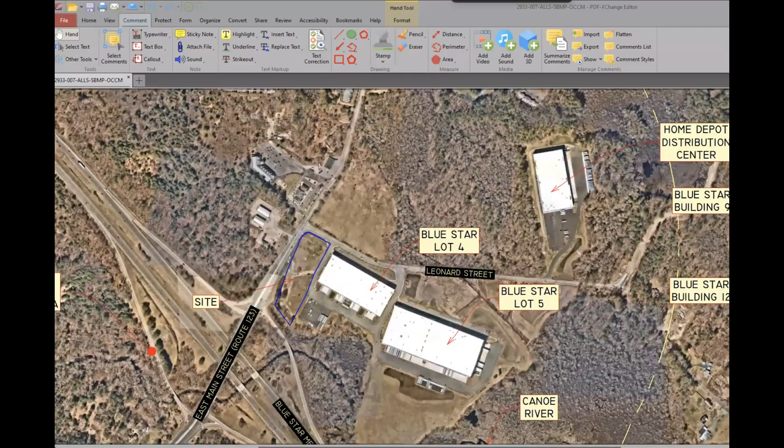Yeah, absolutely. Before you get going, I just want to note that member Lisa Carrozza is going to recuse herself from this project because her husband has ties to it.

Well, I don't want to interrupt the flow, but I've been thinking about this. She would certainly recuse herself from voting on decisions, but as a resident of town, I think she is certainly able to ask questions. It's been identified that there is a connection through a relative having done work, but I don't see... what does recusing in this context amount to?

If we were meeting in person, what she would do is step down from the podium, so to speak, or the board, and go into the audience. So with the kind of procedures made through virtual meetings, it's best for her to turn off her screen and technically be a member of the audience under that condition.

Okay, but I personally don't think that's necessary. We've identified what some people could consider an appearance of conflict, but this is not the equivalent of a gag order during a proceeding, so I'm a little more relaxed about it in that regard. But we've identified the possibility of conflict, so enough said—we will move on.

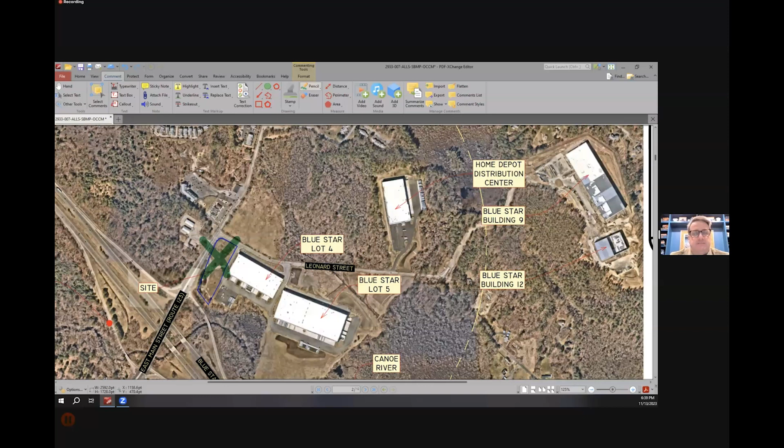If we can turn to the next page, Brandon, showing the facility itself. This is the property we're talking about out front. As I was alluding to, the parking is in the front, on the Leonard Street side, with the entrance coming into the shared access. All utilities are in place. The building is 32,420 square feet, similar in look to the other facilities, with loading docks for trucks in the back.

If you want to touch base, Brandon, and come in on the civil design and engineering with landscape and the basins, infiltration, traffic flow, we can go from there.

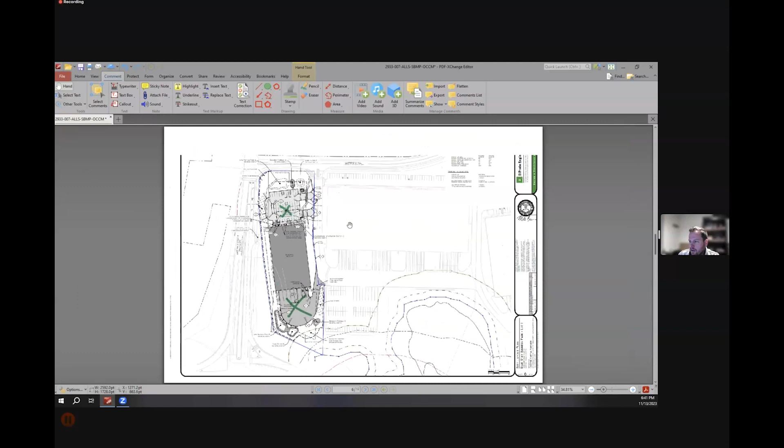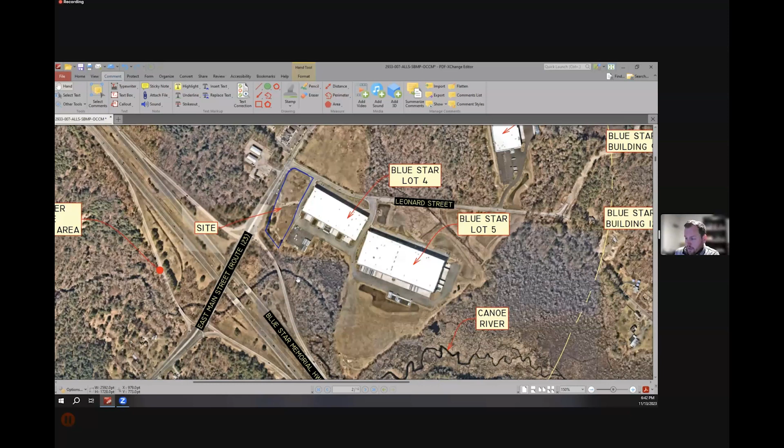I should point out why we're before conservation. If I flip back to the aerial, this site is located at the front here, right at the corner of East Main and Leonard Street, and the Canoe River is south of our property, with some wetlands associated with the Canoe River. We don't have any wetlands on our site, but a portion of the 100-foot setback from the wetland and the 200-foot riverfront do come onto our site.

So all our development—all our paved surfaces, stormwater ponds, and buildings—are outside the riverfront. The only section of work we're doing in the riverfront is this small area here, which is actually disturbed today; we'll just be removing a bit of a stockpile that extended into the riverfront. We'll be reseeding that and letting it grow back naturally. The previous application did have work in that riverfront, so the only work here is to restore that riverfront area.

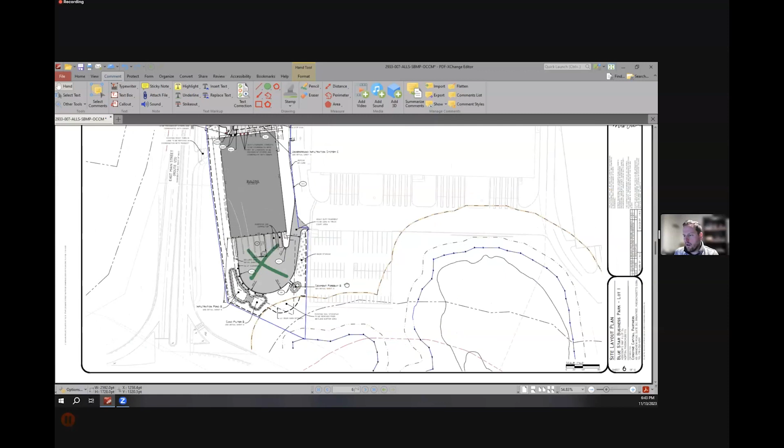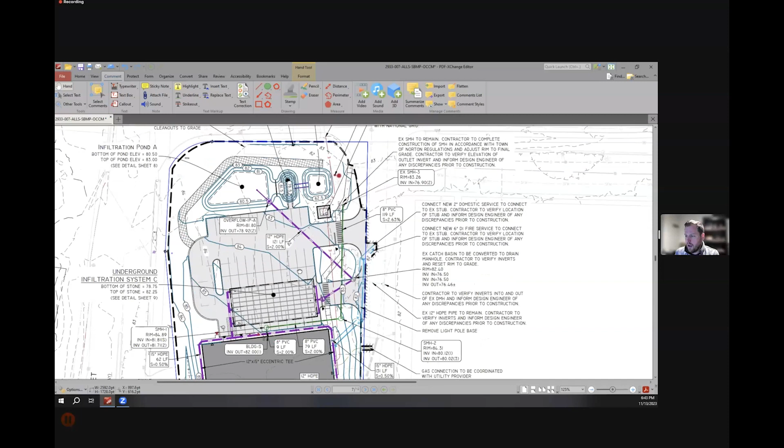From a stormwater standpoint, we have 3 treatment BMPs. Working from the front to the back of the site, we have a combination sand filter here, an infiltration basin that treats the front parking lot, then an underground infiltration system that serves the roof. The overflow from that front sand filter is connected into there, so that infiltrates up to the 100-year storm for the front parking lot and the roof—those 2 practices combined.

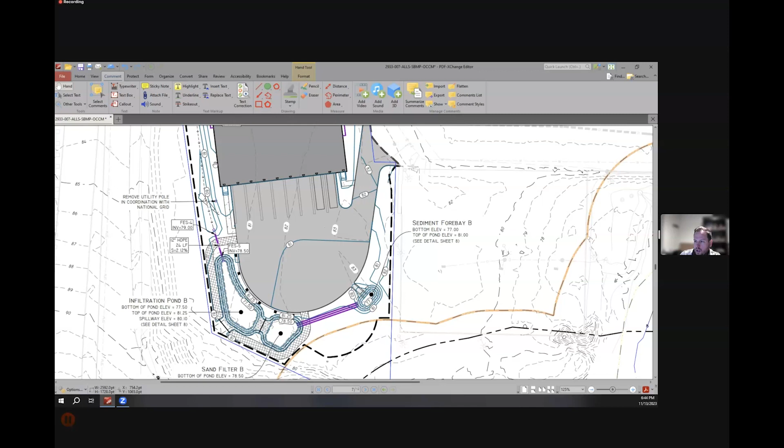In the back, we have a similar setup—basically a paved waterway to a sediment forebay, to a sand filter, and also another infiltration pond. That handles the back parking and loading area, as well as a swale that runs along the western side of the building, between our building and East Main Street, which captures some runoff from that side yard area and some that comes down the embankment from 123 East Main Street.

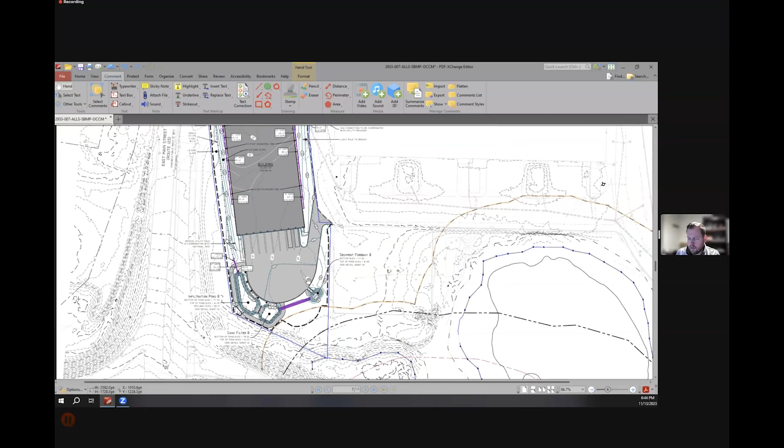I don't believe that infiltrates up to the 100-year storm, but it overtops, I think, past the 25-year storm. But we meet all requirements on a site basis and watershed basis—water quality, infiltration, and peak attenuation. Everything's designed per the town standards and per the Mass DEP Stormwater Handbook. We did have a peer review done by, I think it was Amory, which I don't have in front of me right now.

Was it Amory, John? It was Pat Brennan. He's actually, I guess, not working with them anymore. He has his own business now. I recognize the name, and I think he used to - so Pat Brennan did the review.

We got 4 or 5 comments, responded to them, and got it all clear from him on that. If there's any questions on the peer review, I can go through it, any of the individual items.

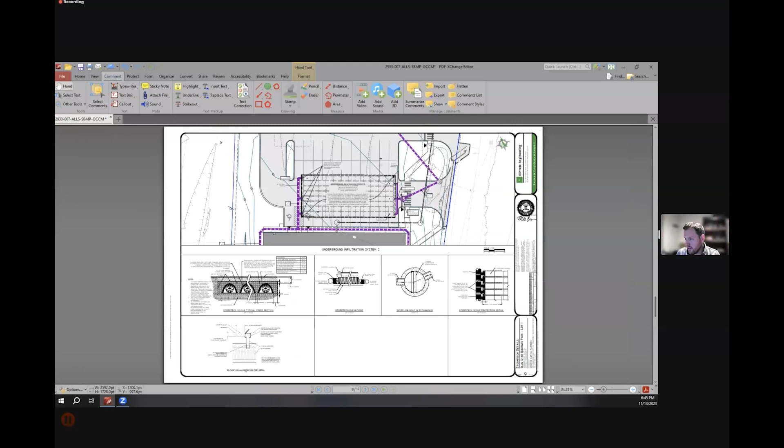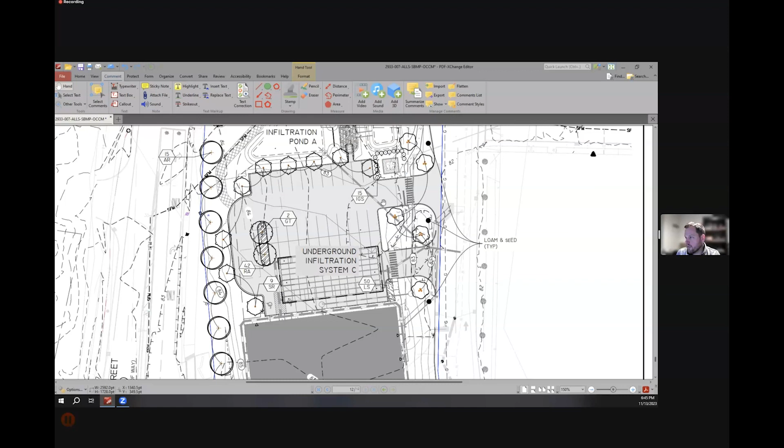I'll just walk through the landscape plan we submitted. We're providing street trees along Leonard Street, some plantings around a proposed sign on the corner, and street trees down the side to buffer us from East Main Street. Plantings, required grass and different plantings in the 2 stormwater areas, and some street trees around the parking lot.

The remainder is loam, seed, and some screening for the transformer up front. But for the most part, a very typical mix, similar - one of the same species that we provided in the back for phase 2, Blue Star.

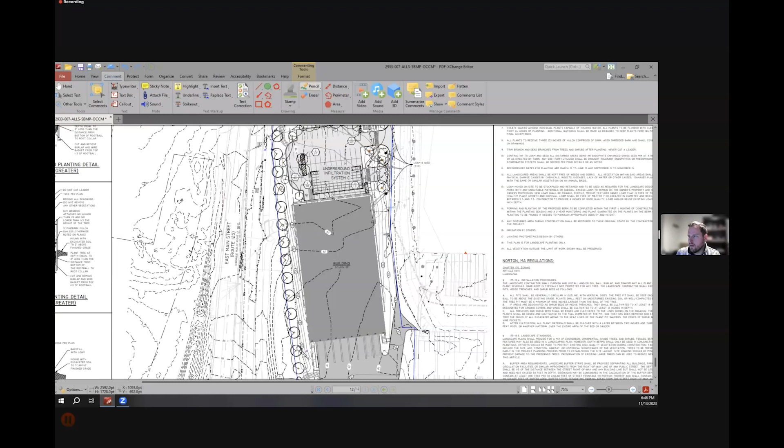The last thing, not really a conservation item, but in case anybody has questions - there is an existing right turn lane off of East Main Street that was going to come in right between the 2 retail lots. One retail lot stood here, one stood down here, so that served as the main entrance to that retail off of East Main.

That's going to be removed as part of this. It doesn't work for this program anymore, so we would work with MassDOT to remove that curb cut. So I think that's a high level overview of the site design.

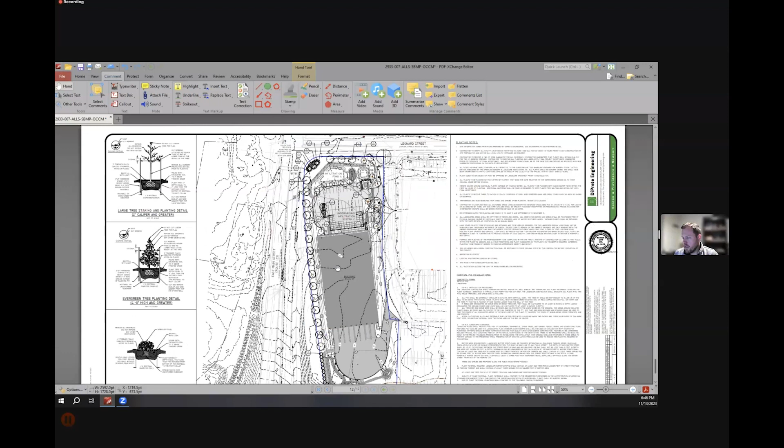We did a site walk with a few members, John, on Friday. And like I said, we received an all clear on the peer review, but if you have any questions on particularly the site design, anything we're proposing, or the peer review, we're happy to answer them.

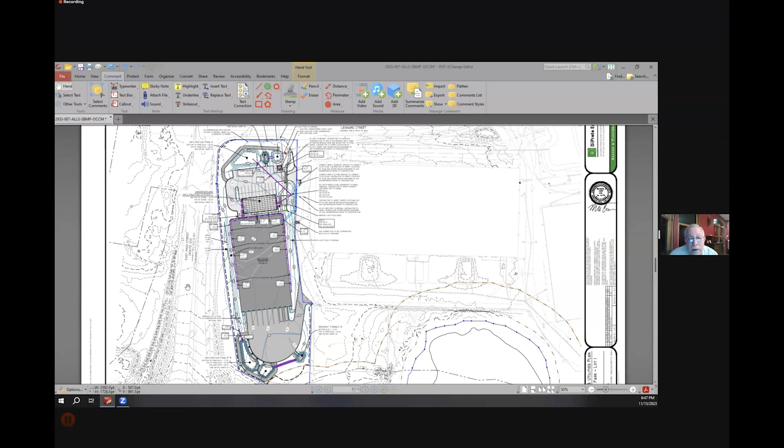Thank you. So from what you summarized, it appears that there is less impact on the riverfront area and no impact on the wetland 100-foot buffer, as it was before. But you said there would have been a little riverfront area impact that's now being reduced to none.

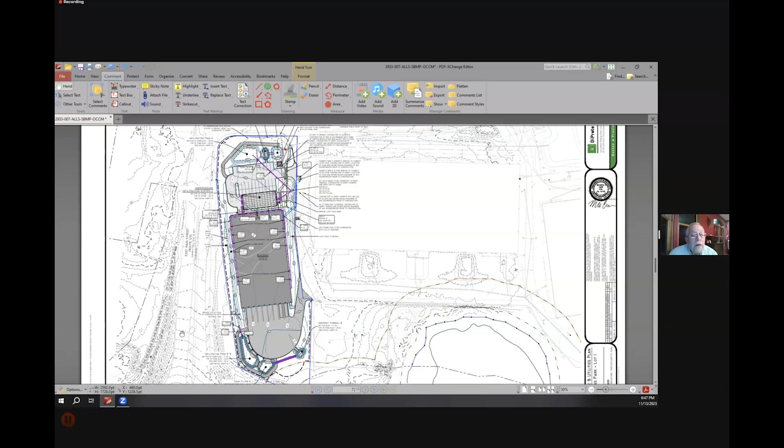And then the stormwater has met peer reviewer standards - steel plates, steel trench boxes, steel beams, things like that that don't have any moving parts, and certainly nothing going to be piling gravel down there.

There's no room for that, and that's not what this is all about. To pile anything on there would do the things that you said, cause a mess. I'm looking to have a nice clean gravel yard there with all the water that rolls off into the right areas.

It's going to be a nice, neat and tidy place of just new and refurbished equipment that we sell and rent. So it's not going to be a yard for bark mulch or loam or any of that stuff. That's not my business, I leave that to the other guys.

But you will have reasonable sized machines there to move that equipment and load and unload it, I assume, from transport. I might have a small forklift over there, that would be it. So that would be suitable for the size of equipment you're saying you're storing there. Absolutely, yeah - only up to a 12,000-pound forklift is really probably the most I would need.

So John Thomas, I would just ask that we add a condition that says there's no material stockpiling. I know you don't intend to, sir, but who knows? Well, I don't intend to, but I don't want to go down the road of putting all kinds of arbitrary restrictions on there. You just don't know what's going to happen in the future either.

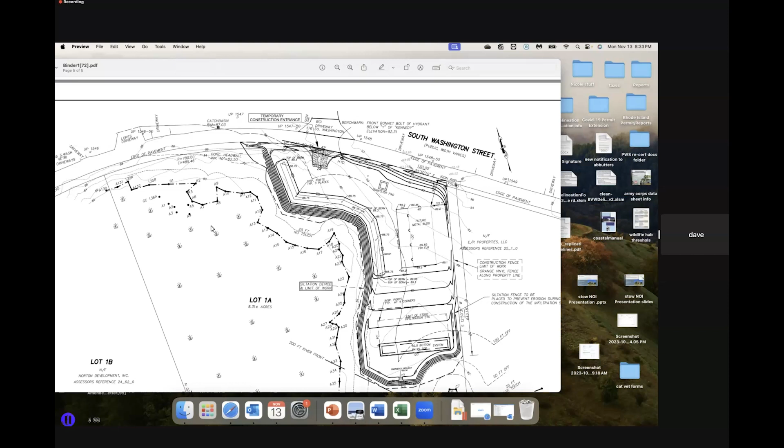We'll be stripping out any organic material before we put any gravel down. But by the same token, regardless of how long that facility has been there, if it became degraded to the point where mud and other materials were washing into the reservoir, that would spark immediate action on the part of the director and the Conservation Commission. So that's our concern, is just to be maintained.

All right, so a question as to what we do. I'm assuming this modification of the plan, we have suitable information in order to act on an amended order. Is that correct, John?

I mean, unless there's some other sort of outstanding items that people want put on the plan for clarification, we can just, pending receipt of that final plan, make this happen as well. I think there were some questions and concerns that were raised by a couple members this evening.

I think the most important one is to make sure the detail for the gravel is there, make sure it's sufficient, and make sure it's noted where the contractor has to put the gravel. Will do. And I would also show the areas that you're gonna stabilize with grass. That way, when you come back for an as-built, it's clear.

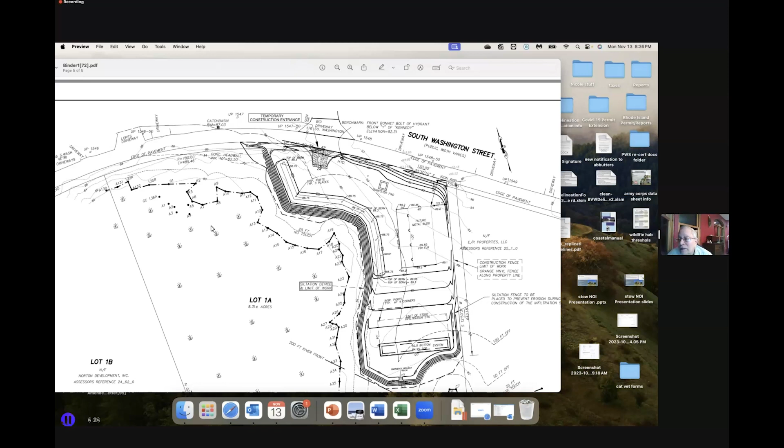Sam, computer name Sam? You have to take your mic off mute though before you can ask. Is that a real? You know what? That's my cursor in the wrong spot. All right, I take it back.

No questions. So we can consider a motion to close. So moved. Sorry, I'll make that motion to close the public hearing for file 250-1119.

Yeah, I think Ron got it as the motion. You got it as the second. So we can go ahead and vote on the motion to close.

Starting with Lisa and Ron. Aye. Aye. And Paxton and Tama. Aye. Aye. And Dan, and I'll throw in an aye. All right. All right, the motion carries.

That's file number 250-1119 is closed. Our next item is notice of intent, file number 250-1138, I guess. 14 Guy Street.

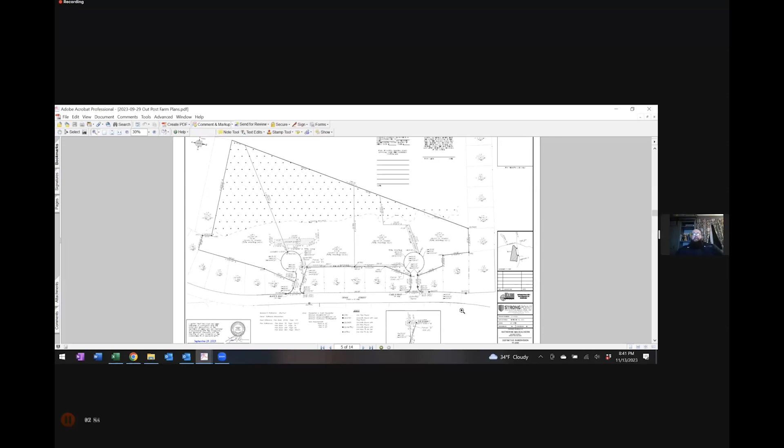Just to recap, when we last left off at the last meeting, I don't want to put words in the commission's mouth, but I believe the commission was relatively comfortable with what we're proposing. We had a pretty clean letter from Pat Brennan with just a couple of things to address. The commission asked us to continue, to give them time to prepare an order of conditions inside of the, I think it's 30-day or 21-day window, whatever it is. To the extent the commission appeared satisfied, I certainly did not want to rock the boat.

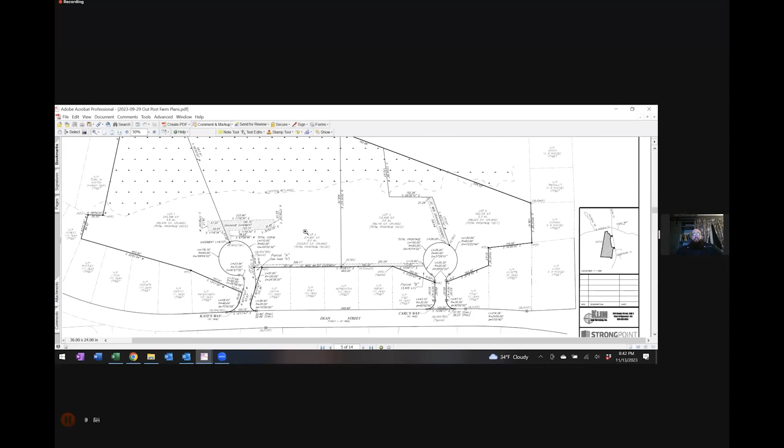However, we went to the planning board the next night and they asked us to make a few changes to the plan, so we did. Nothing that I think the commission will have an issue with. A few things that I've actually spoken with John Thomas about, but I'd like to just walk you through those real quick so you know exactly where we are at this point.

If I can go to the plan set here. Now, I've only reissued the sections of the plan that warranted revision at this point, based on some of the comments that the planning board made. So the first thing the planning board asked about, we talked about the idea of clearing and how to help ensure that these lots don't end up cleared at some point in the future. And we noted that obviously there's a large BVW on the site and the commission has a 25-foot no-touch buffer.

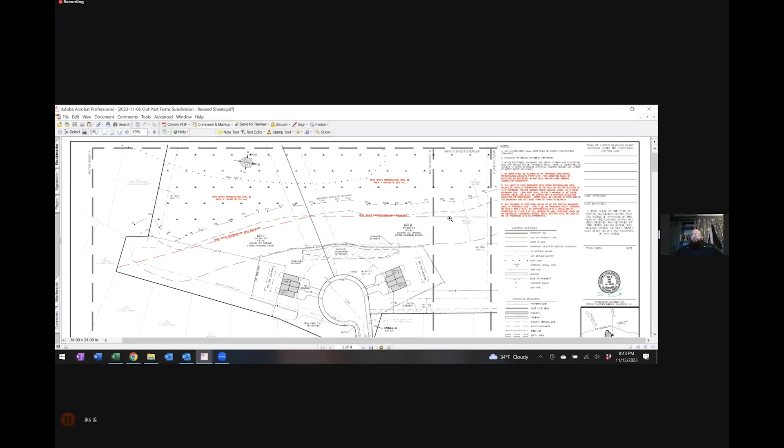It appeared that everybody might be a little bit more comfortable with a bit of a belt and suspenders type of approach. So after consultation with Mr. Thomas, what we're actually proposing is, you see the red line that we put across the back of these lots, and I can go to the next sheet in the set as well. You'll see the same or a similar red line along the back of these lots, and they approximate the 25-foot buffer zone.

What we're calling them is an open space preservation boundary. It's a reasonably significant portion of the overall property, and the idea is that there will be a condition of approval, either written into the deeds as a deed restriction, and certainly part of any HOA documents, that basically identifies that in perpetuity there will be no clearing of trees beyond these red lines on any of these lots. We propose to mark them with wooden posts with appropriate vinyl medallions on top every 75 feet or so, just to make sure there's some demarcation of that in the field. Hopefully that helps give people a little bit more comfort level with a belt and suspenders approach to limiting further clearing, even beyond what the commission might one day allow.

The other thing that we've written in, and this is probably less of a condition issue, but just some guidelines for vegetative screening between the lots and the existing abutters, basically to maintain a vegetative screen. Anywhere that we can't, we will install either a fence or an evergreen screen of some sort, just to help limit visual impact.

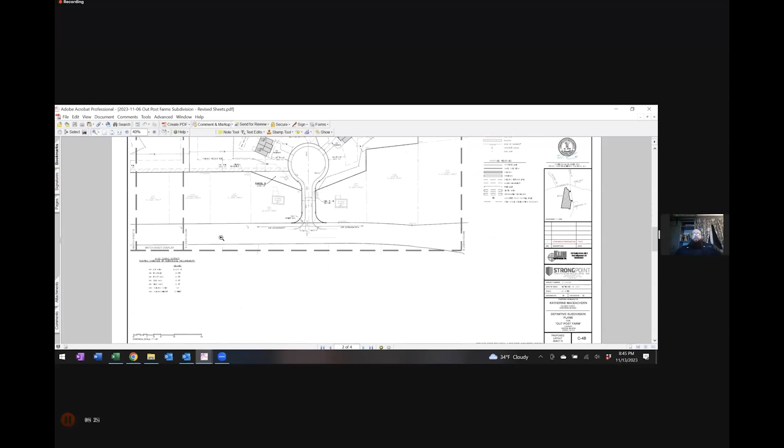The last thing we provided on these plans, in response to a comment from Pat Brennan, is on the erosion control page. We added a whole plethora of notes covering construction phase inspection and monitoring requirements, basic minimum requirements to maintain erosion controls and protect the stormwater system during construction. This project will be subject to a NPDES construction general permit, and there's a SWPPP that goes with that, which will govern. We wanted at least absolute minimums on the plan, and then refer back to the SWPPP for additional controls.

So those are the only changes to the plans from what you last saw. I think they are improvements. Conservation areas are always a good thing, and more controls for keeping the site clean during construction can never hurt.

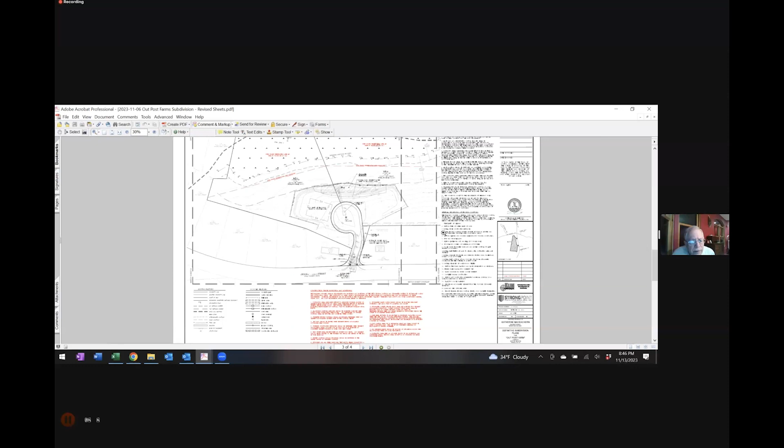From your plan, you don't even get into the buffer, and currently it is not cleared into that area, is that correct? That is correct, yes. Currently the site is largely vegetated. The only place we're getting into the buffer zone is in this location here, this hatch striped area. This is going to be a discharge from a stormwater outlet. It discharges right here, outside of the 25-foot buffer.

We made sure to keep it more than 100 feet away from what is technically a potential vernal pool but is very likely certifiable, so in the event it ever is certified, we've already accounted for it. We're 100 feet away from it, and we're good to go. So this area is the only disturbance proposed within the buffer zone.

Okay, I'm really confused by this open space. You're not giving us anything, we already own the first 25 feet that you can't touch. So what, it's between there and the 100 that somebody could clear right up to that property line, is that what you're saying? This open space designation means nothing because we already restrict the first 25 feet. So why isn't that open space 50, 75, or why doesn't it go to the edge of the buffer? We should be drawing the line in the sand at the buffer zone, because right now these people can take this and clear all the way back to that open space.

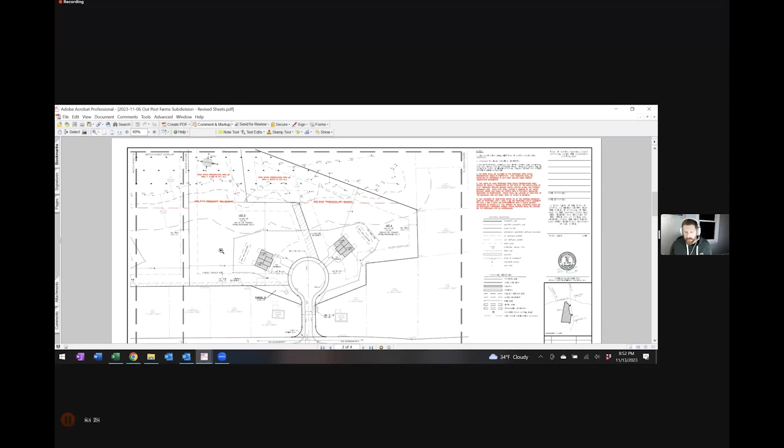So if we're going to start doing that for every project, we're going to have to have some sort of visual barrier fee, because we don't have enough funds to pay for that. So that's another thing to think about. Can we use the Wetlands Protection Act fund? It's a local requirement, not wetland protection. So that's the issue. Okay, well, something to consider.

All right, but we are set to close this hearing for this, correct? Yes, we are. And are we ready for that step? Yes.

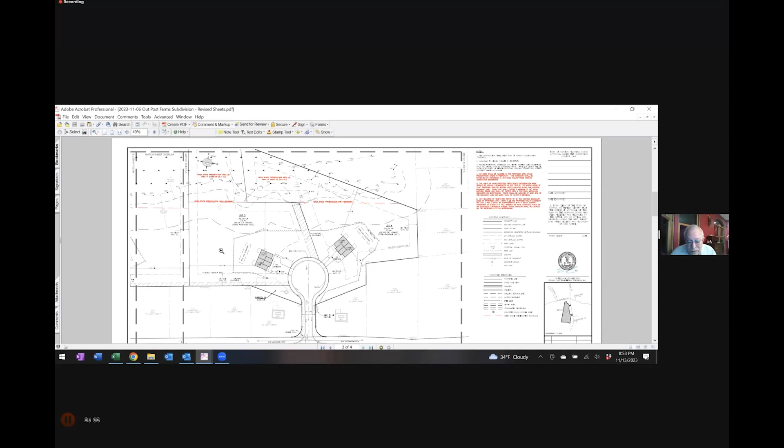Well, we need agreement with the commission members, and if we have that agreement, let's hear a motion. And the file number is 250-1139. I'll make a motion to close that file number.

Motion made by Tama, seconded by Paxton. Roll call vote, beginning with Ron and Paxton. Ron, aye. Paxton, aye. Tama and Lisa, aye. I'll throw in an aye. And how do you vote, Dan? Aye. All right, very good.

So now, according to the agenda, our next item is the request for a Certificate of Compliance for file number 250-1023, related to one of the retail projects abutting Route 123 and Leonard Street. The other next one is also requesting a certificate of compliance for 250-1024. No work was done on either of these projects, and as I understand it from John, they can be closed out in favor of the hearing that we had tonight. Yeah, they should be closed out before the commission would ever make a decision to clean the slate.